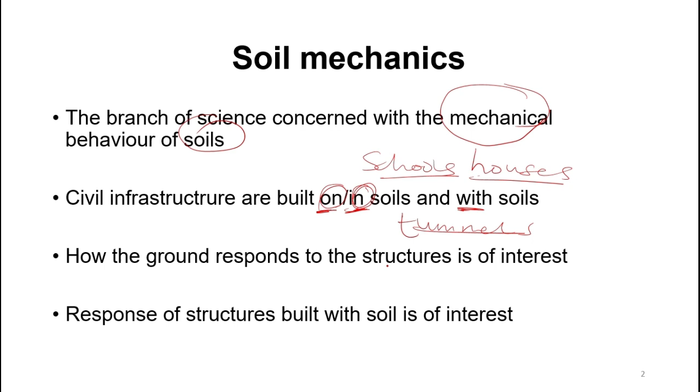As geologists, we'll be dealing more with mining. So we can even construct a mine pit, a mine pit in soil.

Civil structures are also built with soils. So we can construct a dam, an earthen dam, with soil. We also construct roads, and roads are also constructed with soils.

Now under soil mechanics, our interest is to know how the ground responds to these structures that are being built on it.

So let's say this is the soil, and I build my structure, which is my household, on the soil. I want to know how this soil is going to react.

I want to know how the soil reacts to the stresses or pressure coming from the civil structure. So we are going to study the ground's response to the structures being built on them.

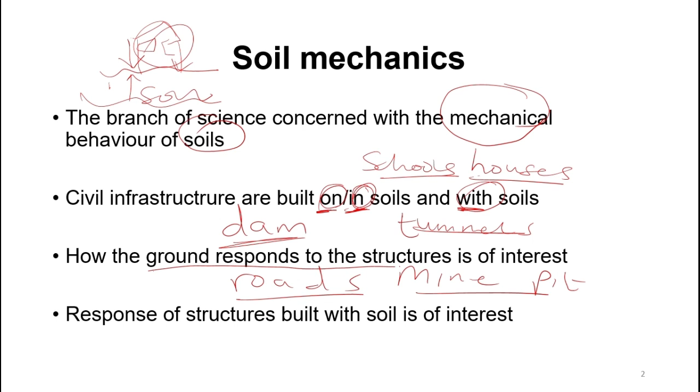Let's study the applications of soil mechanics. In which part of engineering, or in which part of our daily life, will soil mechanics be of importance to us?

In the construction of foundations, before I construct any house or any building, there is a need to construct a foundation. So we are going to study this foundation.

Foundation of structures — how does this foundation behave, because foundations of structures will be in the soil. So we construct foundations in soils, or in the ground, and this ground mainly consists of soils.

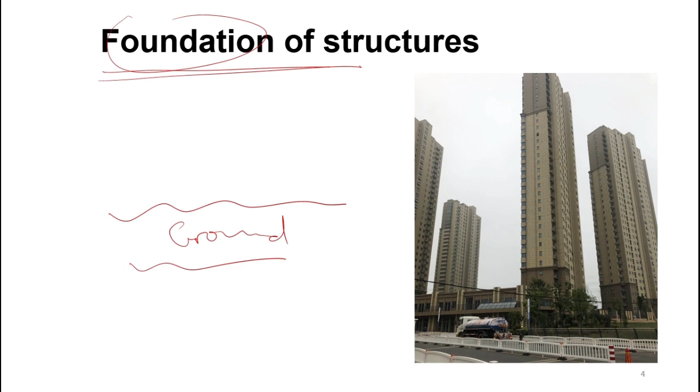Hence, if we want to construct structures in relation to foundations, we will have to study foundations as part of soil mechanics. So that's one application of soil mechanics — foundations of structures.

This is the Leaning Tower of Pisa, and the story about this also has to do with the foundation of the Leaning Tower of Pisa.

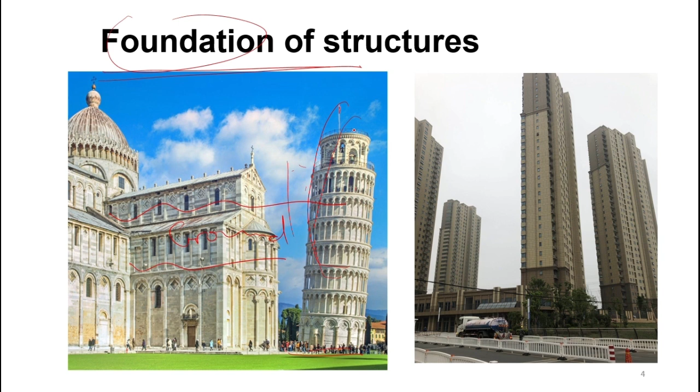The story about the Leaning Tower has to do with the foundation. As time goes on, this building tends to settle and lean. That's how you realize that most structures are supposed to be vertical, but this particular structure tends to be leaning.

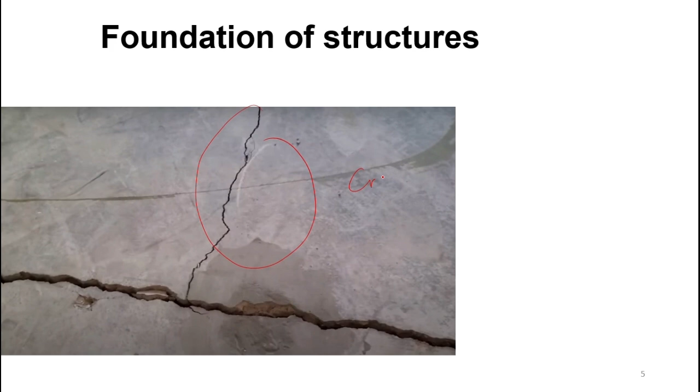Now, foundations may also develop certain cracks, based on the soil type you are going to use. So studying this application of soil mechanics under foundation of structures is important.

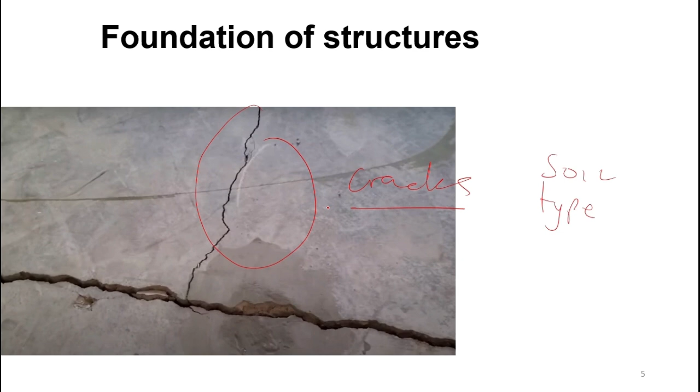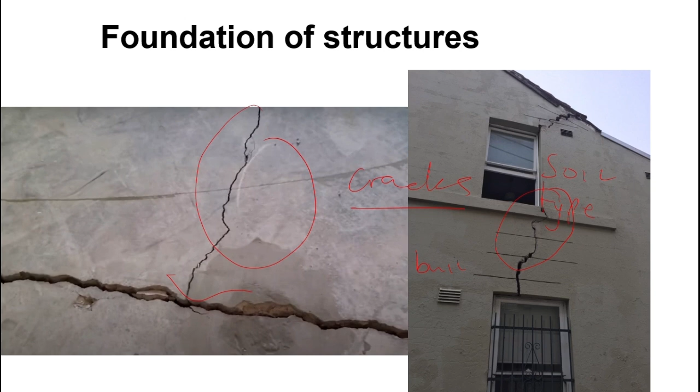Studying this, you will know how to prevent such scenarios, because you could be having cracks also in buildings. So under soil mechanics, we are going to study all this.

Then I did mention that under soil mechanics, we also know that some structures are built with soil. An example is what I talked about — roads.

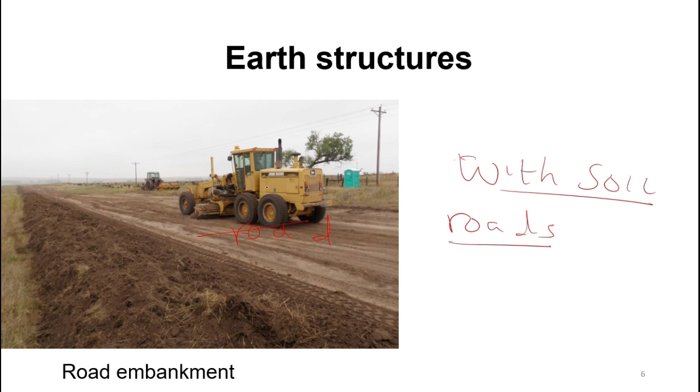Here you could see that a road is being constructed with soil — a road embankment. So under soil mechanics, road construction, earth structures, these are all applications.

Failure due to errors in its construction can occur. Let me play the video so that you can see.

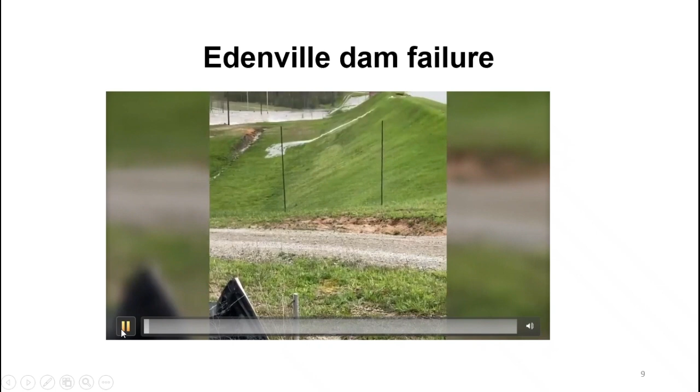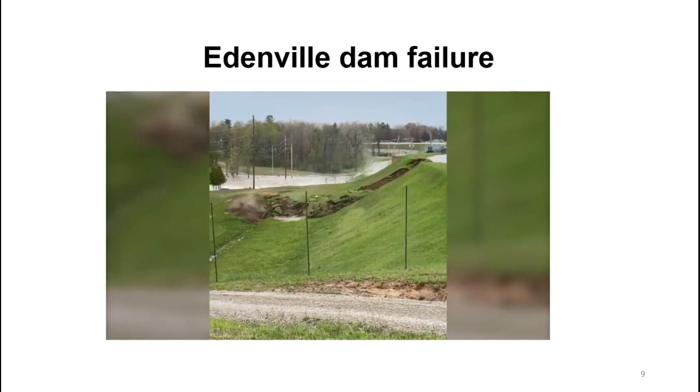This is the Edenville Dam, which failed. There it goes. There it goes. There we go. There's the rush.

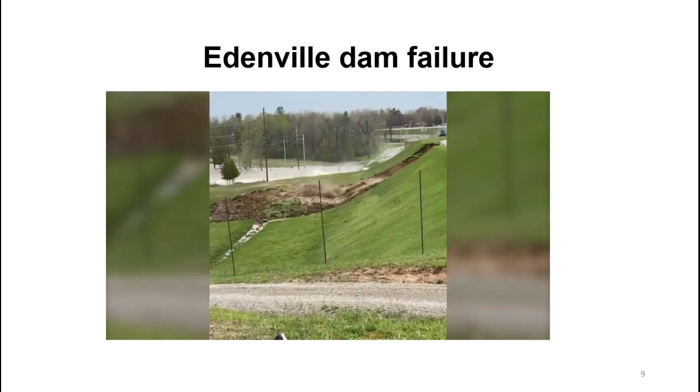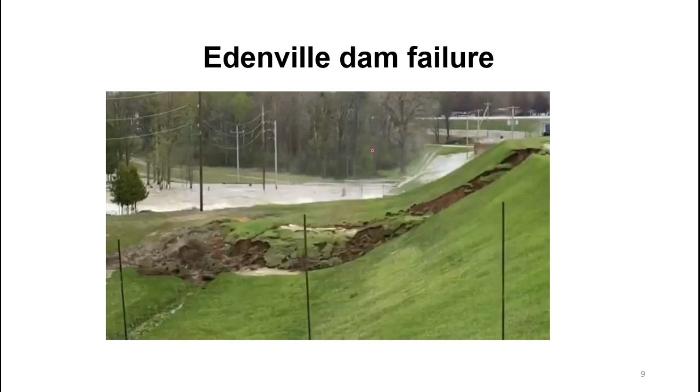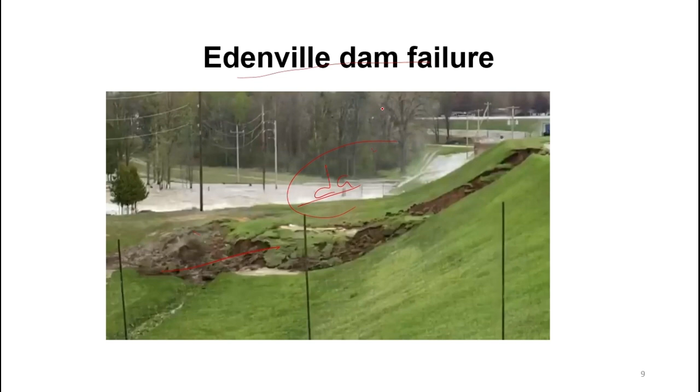So I see that as geologists or as engineers, we are responsible for people, the lives of individuals. You can end up killing a lot of people. So you realize that the failure of this particular dam, all those living downstream, did cause millions of lives and properties to be destroyed. So as geologists or as engineers, there is a need to study soil mechanics so as to prevent some of these cases.

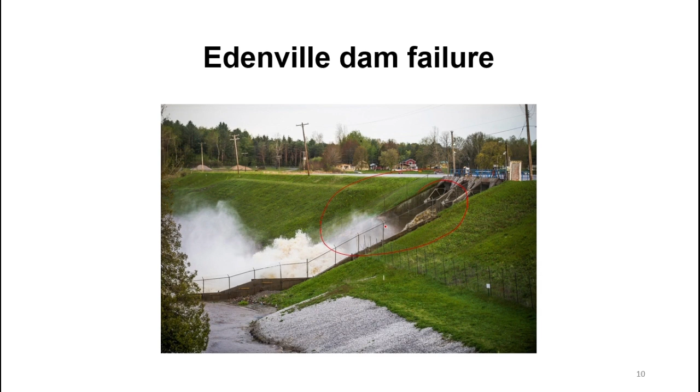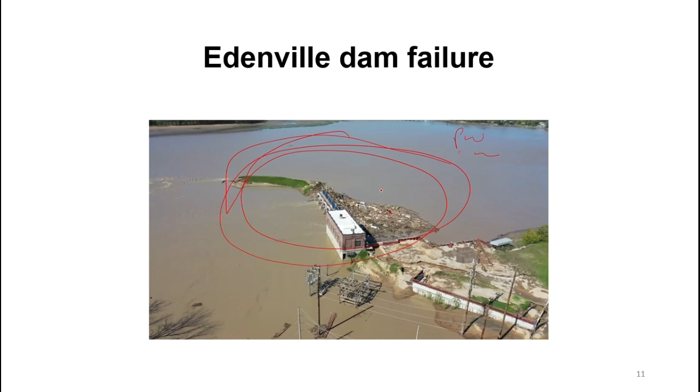So the dam collapsed. You can see how wide it collapsed, and this was not a one-time thing, it began gradually. So this is how severe it is. Initially, everything here was properties, houses, and human lives. But now, due to the collapse of the dam, it's being flooded. You could see how dangerous this could be.

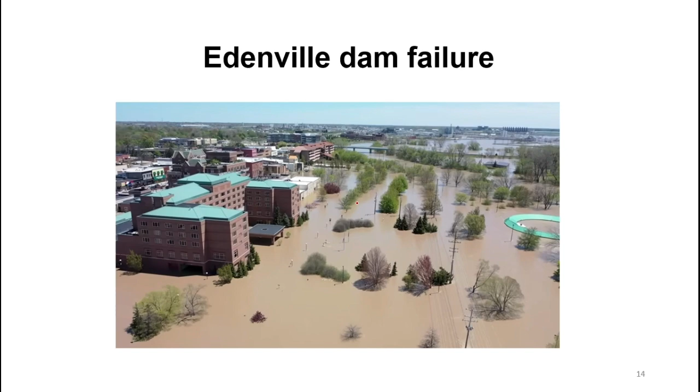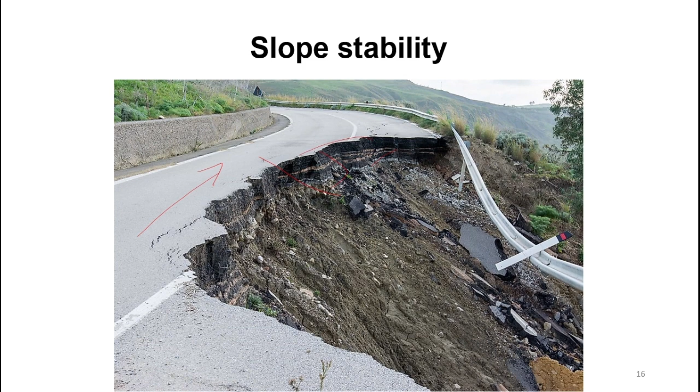Imagine a car moving on this road, and when it gets here, the road tends to fail. It's going to cost lives. Meaning that as engineers, we are supposed to study soil mechanics so well that we are going to prevent such cases. So there's also a slope failure, costing lives, and this is very severe

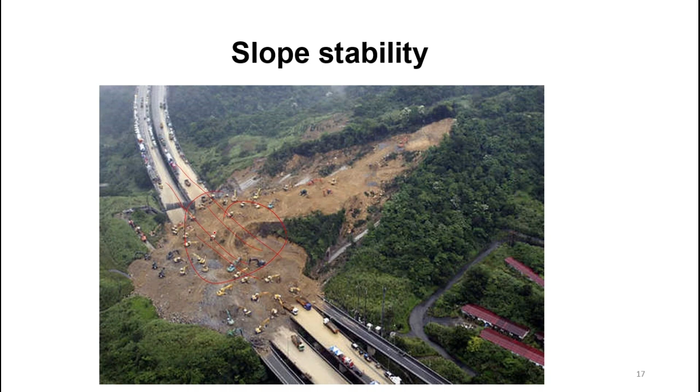because it's going to cause traffic on the road, meaning we are not supposed to use this road for some time, and if there were cars moving when this failure happened, it's going to cause the destruction of lives and properties, destruction of life and property.

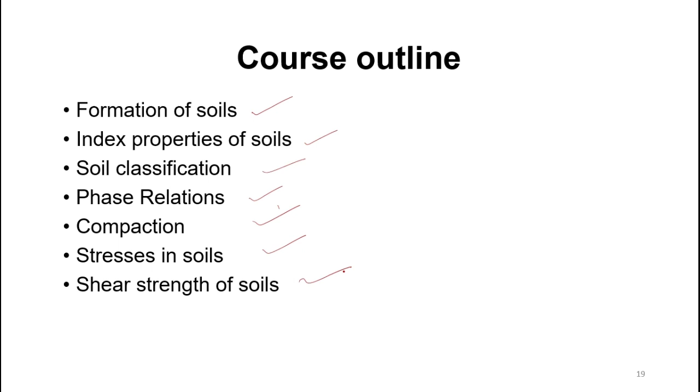Under this whole playlist we are going to talk about formation of soils, index properties, soil classification, phase relations, compaction, stresses in soil, and finally shear strength of soil. Some of the laboratory tests we'll be taking you through are the sieve analysis test, the hydrometer test, Atterberg limit test, specific gravity, compaction, and the triaxial test.

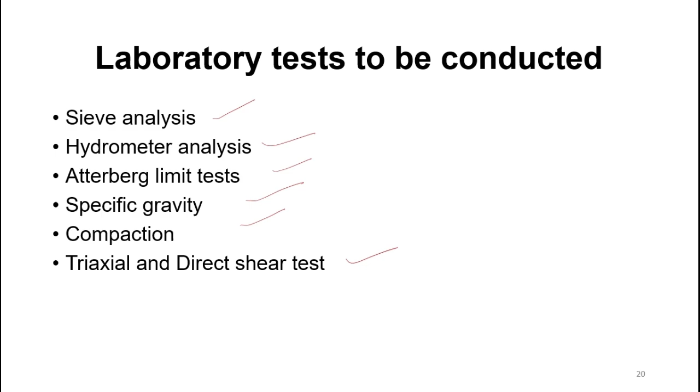Now, let me just take one of them. Life is a just employer. It gives you what you ask. But once you have set the wages, you must bear the task. Just go through this.

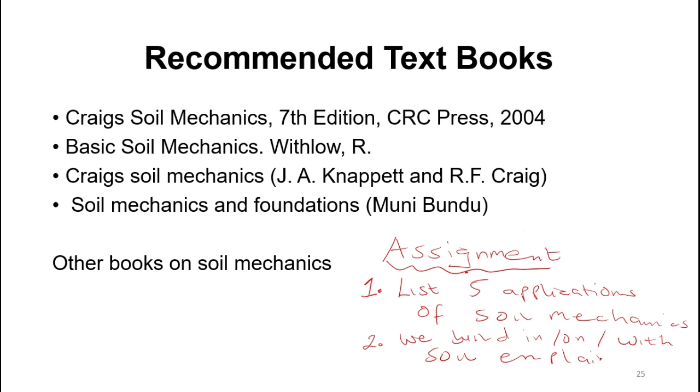So your first assignment: you are supposed to list 5 applications of soil mechanics. Then the second question is: we build in, on, and with soil. Explain. So these are the 2 assignments for today. Enjoy.